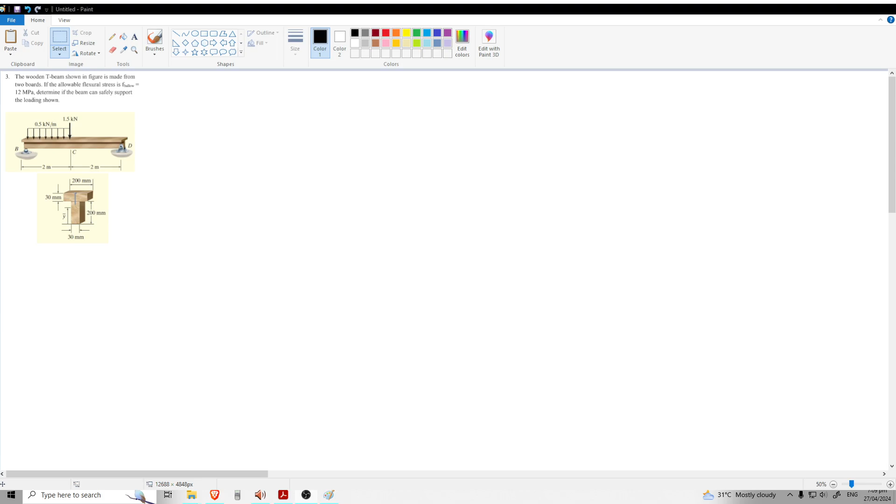Hello everyone. Today we are going to be solving this particular problem, which is about a wooden T-beam. Okay, T-beam. This is a T-beam. It's made from two boards. So if the allowable flexural stress is 12 MPa, determine if the beam can safely support the loading shown.

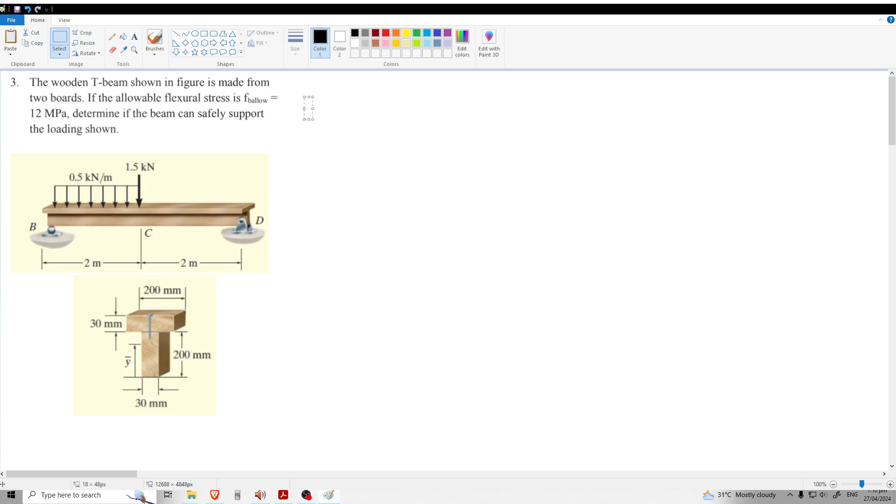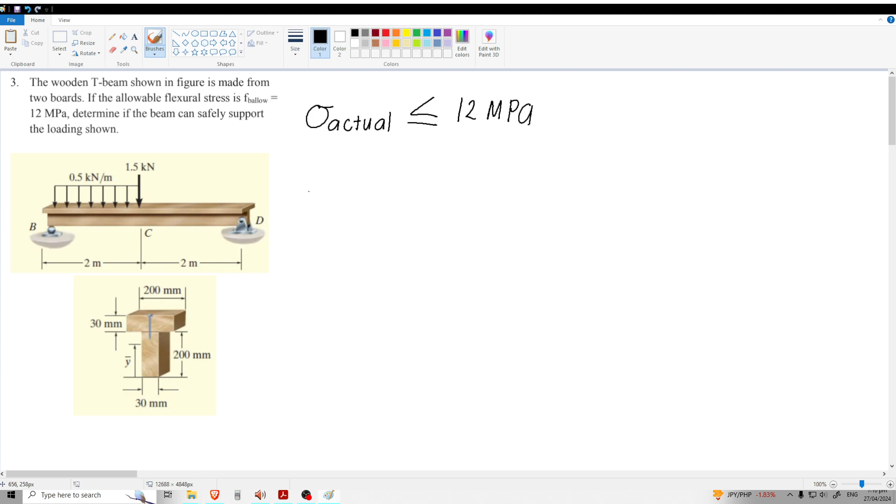So the value that we are finding, which is the actual flexural stress, must be equal or lesser than 12 MPa to satisfy the question, or if not, then we just simply answer that the beam cannot safely support the loading. Okay, so it's just as simple as that. Now remember that the formula for the flexural stress is just equal to maximum moment multiplied by this centroid, divided by the inertia.

Now in this particular problem, which is a T-beam, we cannot simply get the center of this by just 200 plus 30 divided by 2. No, we cannot. This is like an unsymmetrical beam, so we cannot just divide the height by 2. So we need to find it. And also the IXX, we cannot get it just by using the basic formula, which is this. No, we cannot get it through that.

So moving on, in order to get the value of C here, we need to make use of this formula, let me change color, which is just area 1 y1, remember this, plus area 2 y2, divided by the sum of area 1 and area 2.

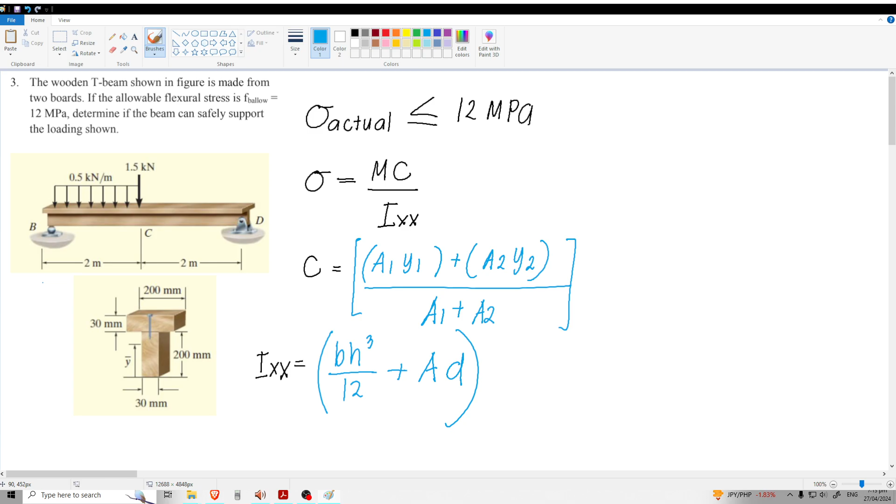Okay, now for IXX, or the inertia, correct me if I'm wrong, you need to make use of this formula, which is basically just base times height cubed over 12, but we'll be adding area times the distance squared. Okay. So this will be a very long process. So hope that you can stay.

Moving on. Let's draw this object. Good. Okay. Erase this. Where's the eraser? Get the head out of here, man. I don't need you. Okay.

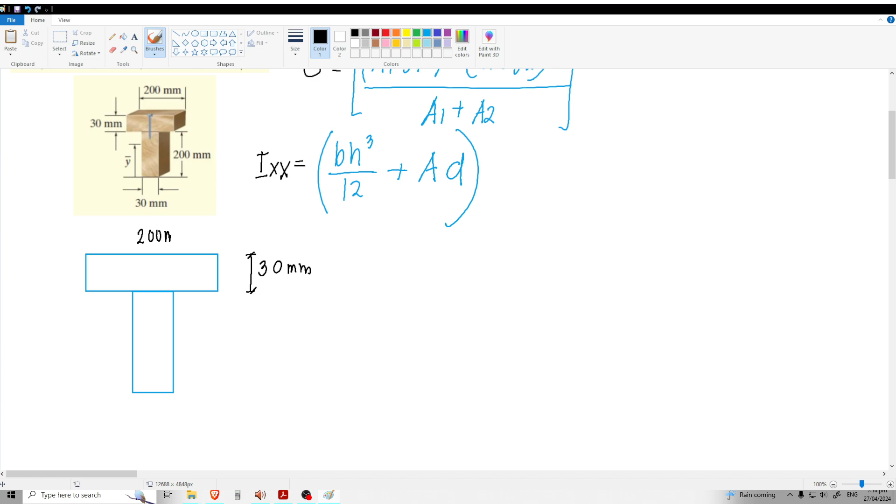So this is 30 millimeters, and this is 200 millimeters. This is also 200 millimeters. And this is also 30 millimeters. Okay, so first things first, let's find the center of each shape. Let's call this area 1 and this area 2. So the center for area 2 is going to be here, and the center for area 1 is going to be here. So the distance between here and here is just 200 divided by 2. This is just 100 millimeters.

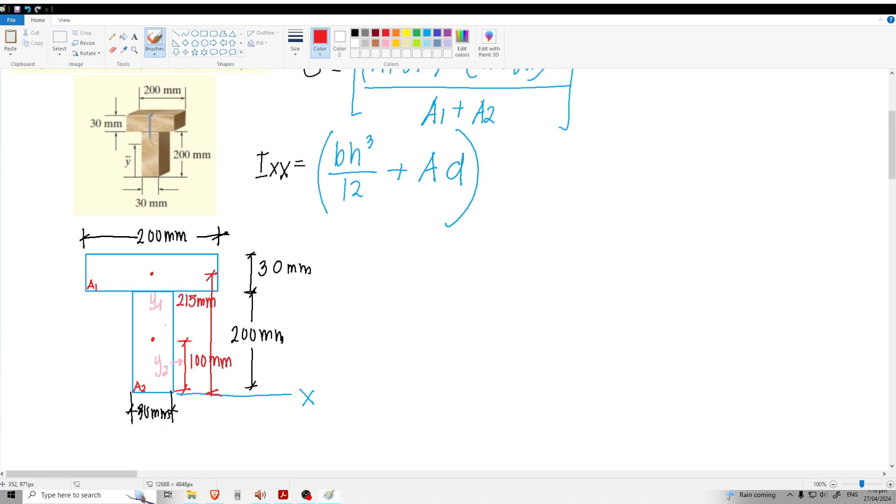Let's also not forget about the baseline, which is this. Let's call it x. Now this distance here is called y2. Now for y1, it is the distance from the center of area 1 to the very bottom at x. So to get the value of this, we just add 200 to 30 divided by 2. So 200 plus 30 divided by 2 is 215 millimeters. So now we have the values of y1 and y2, and we can satisfy the conditions for C.

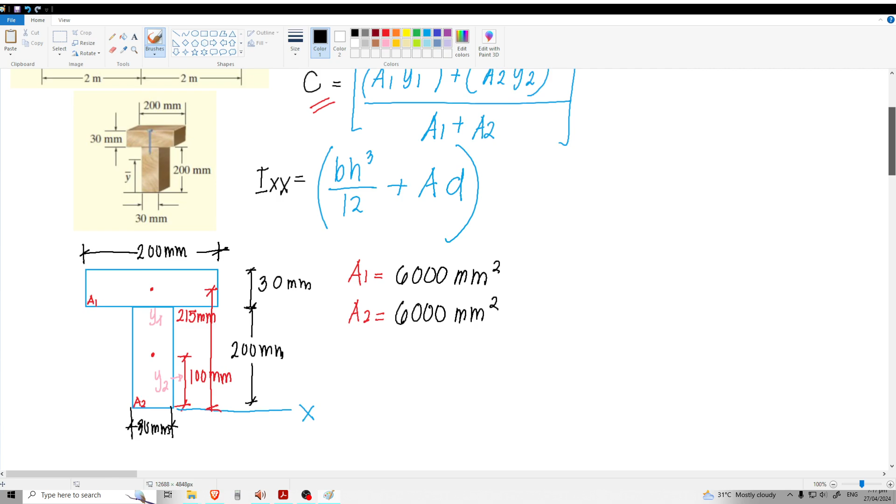But before that, let's get the value of area 1 and area 2. As you can see, both shapes have the same area, so let's not lengthen the process. Base times height is the formula for the area of this shape, if you didn't know basic geometry. So 30 times 200 is equal to 6,000 millimeters squared, same as the second area. Let's not delay.

So for C: area 1 is equal to 6,000 millimeters squared, multiplied by y1, which is 215 millimeters. Then we add area 2, which is the same as area 1, times y2, 215 millimeters. And then we divide all of this by area 1 plus area 2, so it's just 6,000 times 2.

Wow, so smart. Let's go. So smart, bro. You're so smart. What the heck, bro? How do you get so smart, bro? I don't know, bro.

Oh, what? This is not 215, bro. It's 100.

Why so smart, bro? Bro. Fucking cringe, man. Sorry. So this is 100. It's supposed to be 100. Okay. I'm sorry about it, bro. Sorry about that, bro. Okay.

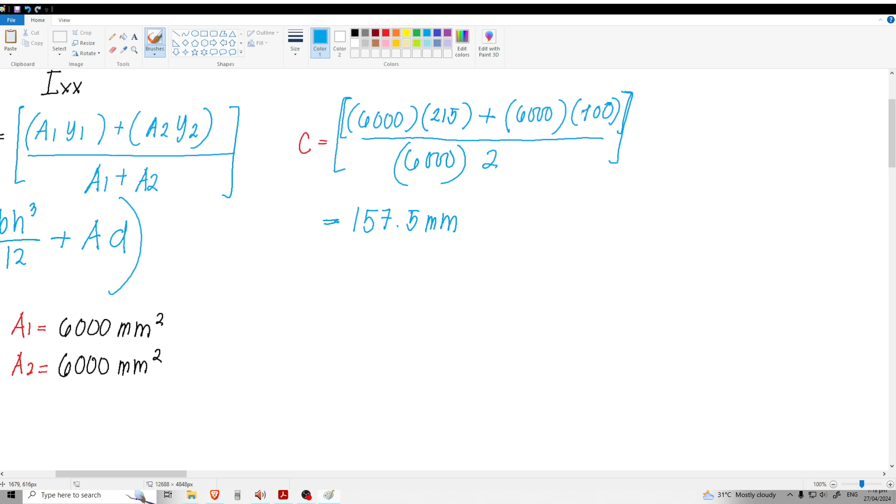So now the answer is 157.5 millimeters. So that is the position of our centroid for these two particular objects. So at the very bottom, we start here towards the very up. So let's assume that the centroid is at here. The distance of this is 157.5. Okay, so this is the C. This is the value of C. Successful. Now we got the value of that.

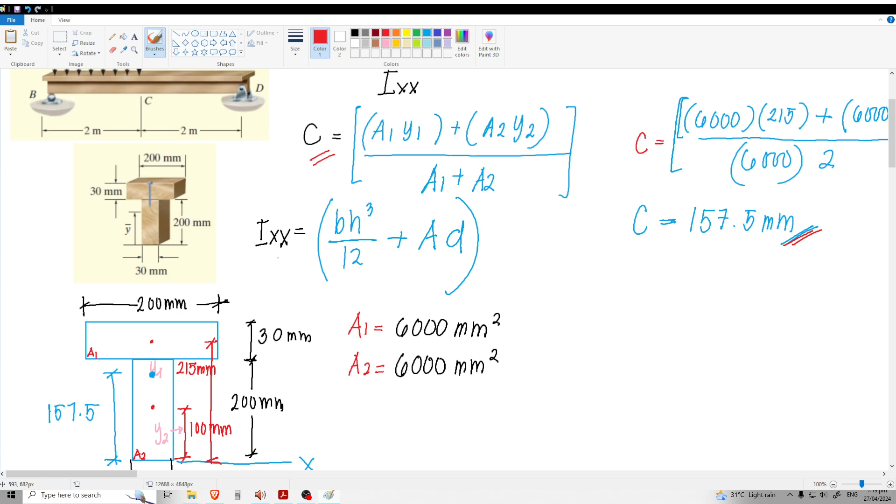Now let's move on to Ixx. So before getting the value of Ixx, we must get the distance between this and also this. So let's call this D2 since it is at area 2, and this as D1 since it is at area 1. Now the distance of D2 is just basically 157.5 minus 100. Let me write, D2 is just basically 57.5 millimeters.

Now for D1, it's just 215 millimeters minus 157.5. Oh my god, I might need a calculator for that, bruh, because I'm not a computer. So the answer for that is just similar, which is 57.5. What? Is it real? Wait. Why are they the same? Let me, yeah, it's correct. I double made sure of it because I never encountered a problem that has the same distance as this. Oh, it's fine. I was just shocked.

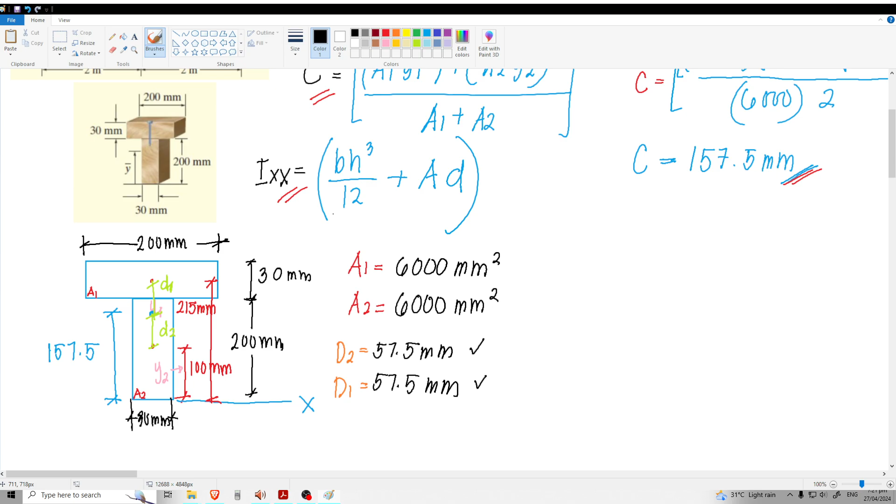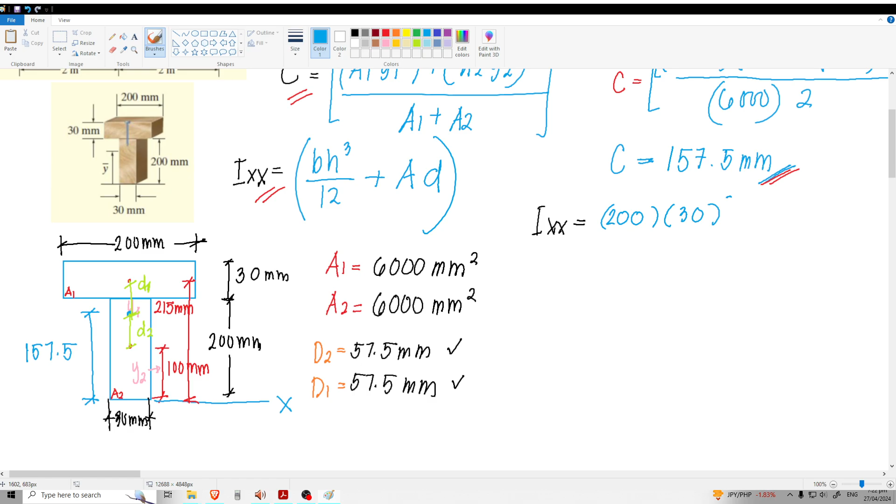So moving on. Now that we get D2 and D1, we can satisfy the formula or the components for Ixx, or the inertia. The formula for Ixx is this, but we have two shapes, so we'll get the value for area 1 and add it to the value of area 2. The base for the first area is 200 millimeters times the height, 30 millimeters cubed, divided by 12. Then we add the area of area 1, which is 6,000 millimeters, multiplied by distance 1, since we are using area 1. Distance 1 is 57.5 millimeters.

Now after this, we add the area 2 version. The base for area 2 is 30 millimeters multiplied by its height to the power of 3, divided by 12, plus 6,000 times distance 2, which is the same. Oh my god. Okay. Now we multiply, add, and we get the answer. So let me pause the video. So I forgot something, guys. I forgot that the d in inertia is squared, so this is supposed to be squared. I'm very sorry for that.

Now what I want to do is step by step get the value for each of these, so we don't make any complications. So 200 times 30 to the power of 3, divided by 12, is 450,000, plus 6,000 times 57.5 squared, which is 19,837,500. And we add this to the bottom part, which is 30 times 200 to the power of 3, divided by 12.

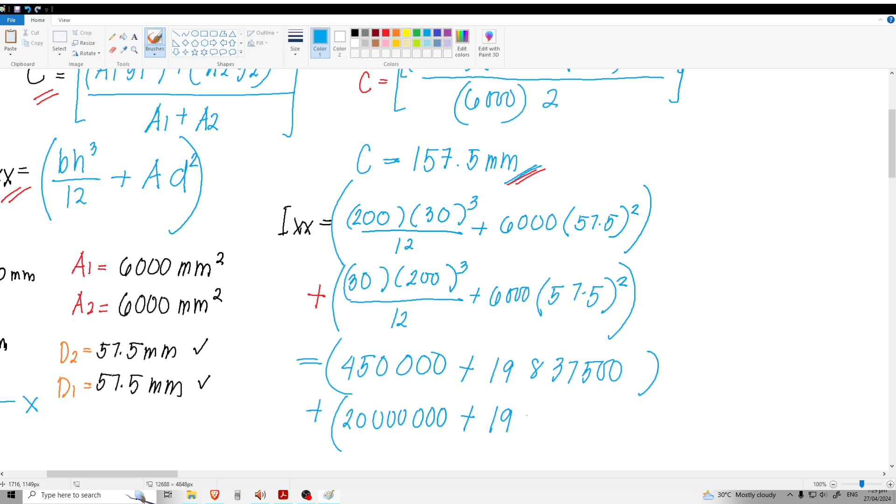Is that right? Let me repeat it. Times the power of 3. So the answer for it is 20 million, right? And then plus 6,000, it's just the same, 19,837,500. Now we just add all of this: 19,837,500 times 2 plus the rest. Okay, so the correct answer is 60,125,000. So this was supposed to be the value. So this is our Ixx.

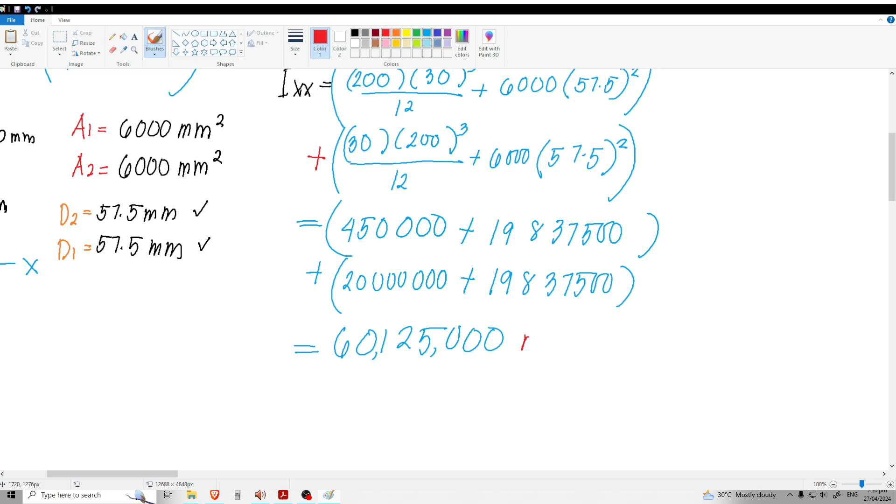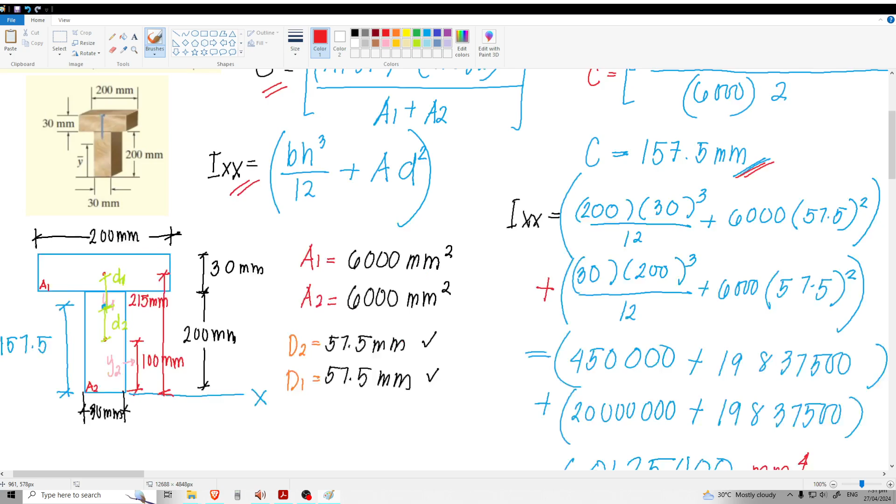Now if you ask what is its unit, it's just millimeter to the power of 4, since this problem is about kilonewtons, so it's millimeter to the power of 4.

Oh my god. Putang ina. Bro.